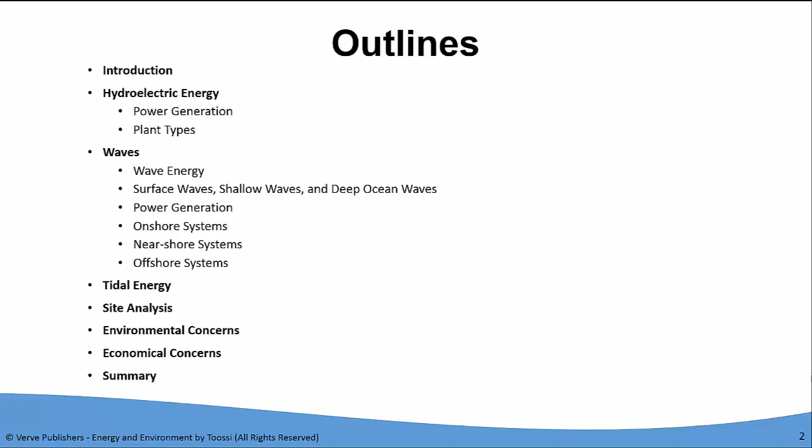In this section, we talk about the various aspects of the water. It's used to produce electricity through the traditional dams, but we also can produce electricity through the waves, through using the tidal energy, and also using the chemical gradients and thermal gradients in the ocean's water.

Basically, water energy is in the form of mechanical energy. It can be due to gravity, which is the power that comes from the dams and the tides, or due to the motion of the waves, which, depending on whether they're surface waves or underwater currents, have different amounts of mechanical energy.

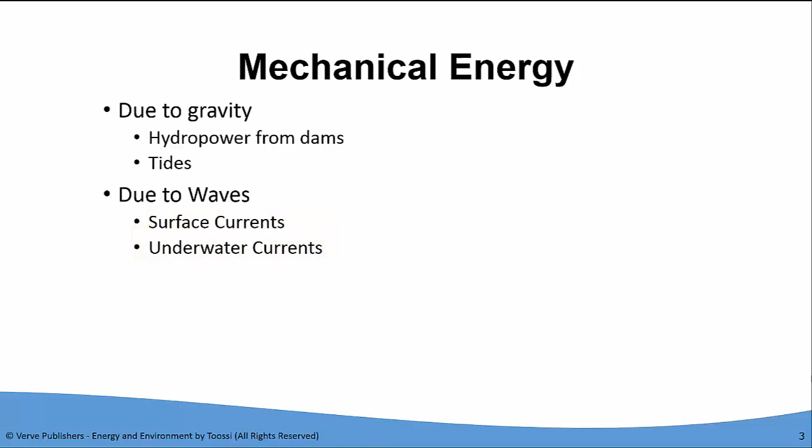This is the simple machine, water wheels, where the water falls on it and turns a wheel, and the wheel is used to lift the weight. That weight could be the weight of the water pulled out of the well, or it could be used to maybe turn another stone and grind the flour.

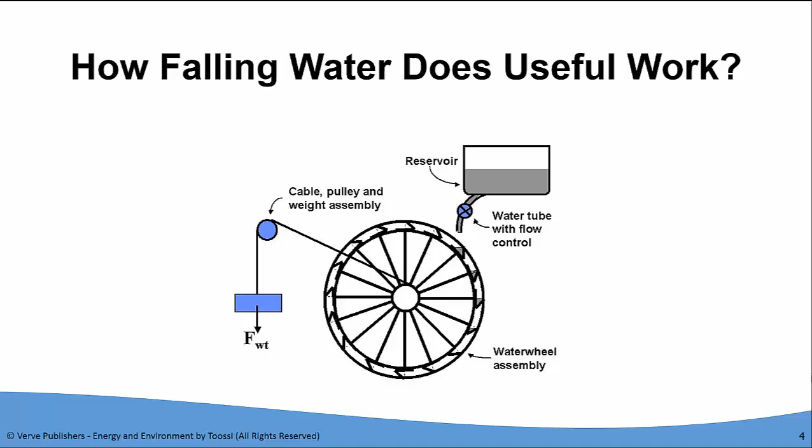Two medieval varieties of water wheels are the undershot and the overshot wheels. Undershot water wheels refer to a paddle wheel fixed to the bank of the river or hung from an overhead bridge. It is turned by the impulse of the water current. Overshots work by bringing a stream of water through a pipe or canal and putting it onto the wheel from above.

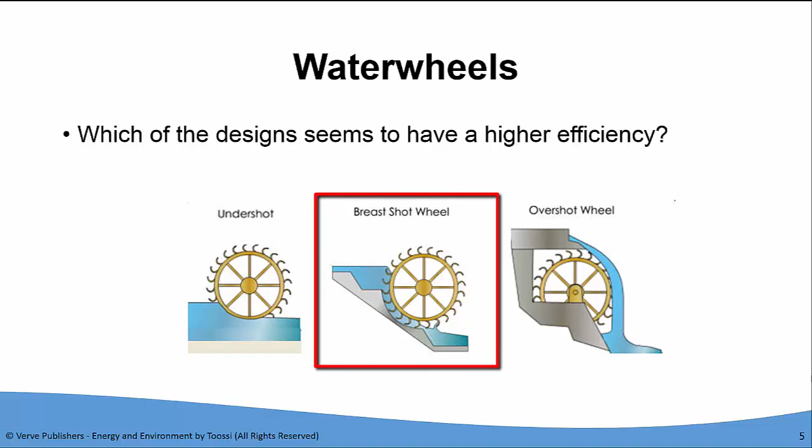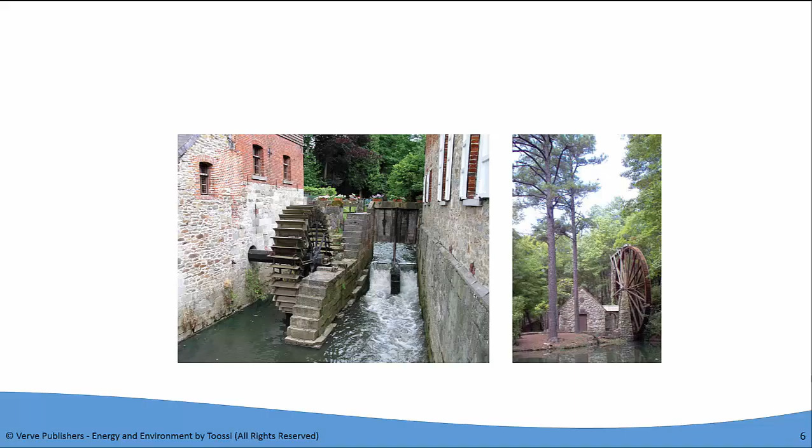Somewhere between the undershot and overshot, we can also have the breastshot, which is pretty much at the same level as the flow of the water. These are two examples. The diagram at the right is an overshot, with water poured from the top, and the diagram to the left is the undershot, and as you can see, the flow of the water will turn the water wheel.

Hydroelectric plants range in scale from large falling water plants used in developed nations to small river runoff plants with no dams or water storage, used for rural electrification in less developed countries. The potential for further expansion of hydroelectric plants for most of the industrial countries is rather limited. They have already built dams wherever they could. But in the developing countries, especially in Asia and Africa, very little has been exploited so far, and so there's a lot of potential for developing small hydro projects.

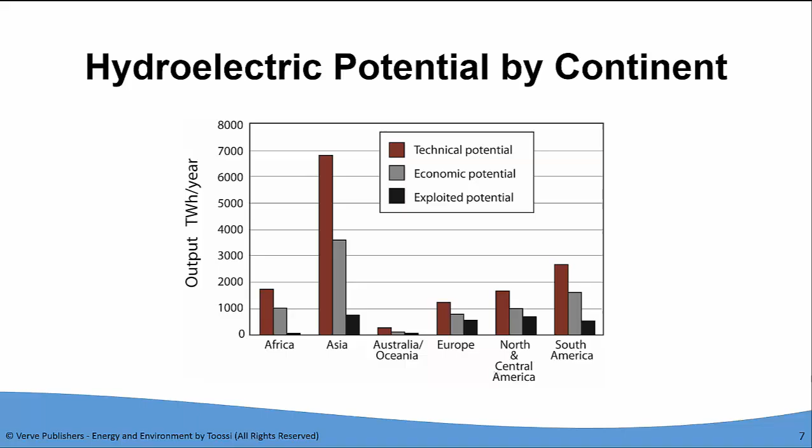This table gives the largest hydroelectric plants in the world. The largest one is the Three Gorges in China. As you can see, the head is a 185 meter drop, and it has a very large flow rate, about 12,000 cubic meters per second, producing about 22.4 gigawatts of electricity, and on average every year it can produce 100 terawatt hours of energy.

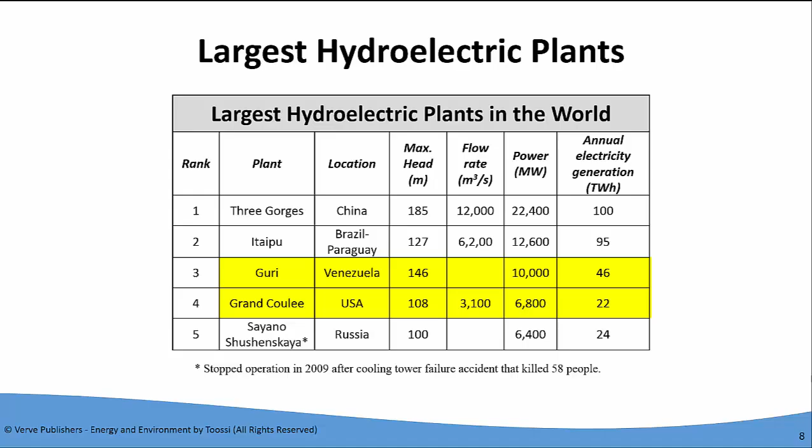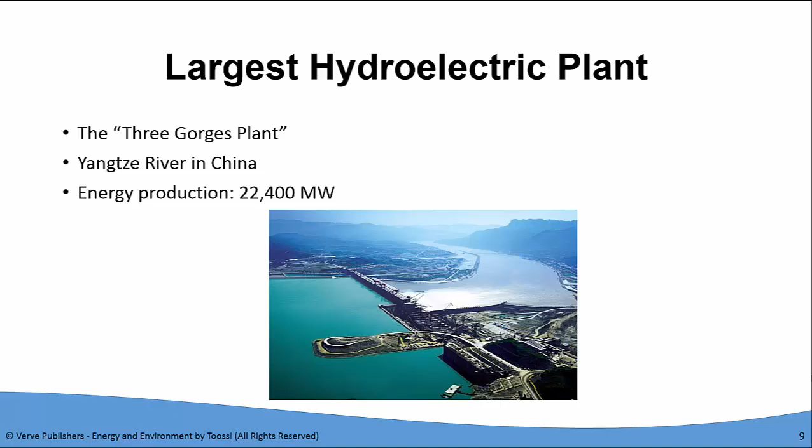The second is the Itaipu, which is on the border of Brazil and Paraguay, and very close to Argentina. This one has a lower head, and the total power is slightly less than the Three Gorges. Other power plants are in Venezuela. The USA's is the Grand Coulee in Washington, and that one is only about 1/5 as large as the Three Gorges. This is the picture of the Three Gorges plant, which is installed on the Yangtze River with a production capacity of 22,400 megawatts or 22.4 gigawatts.

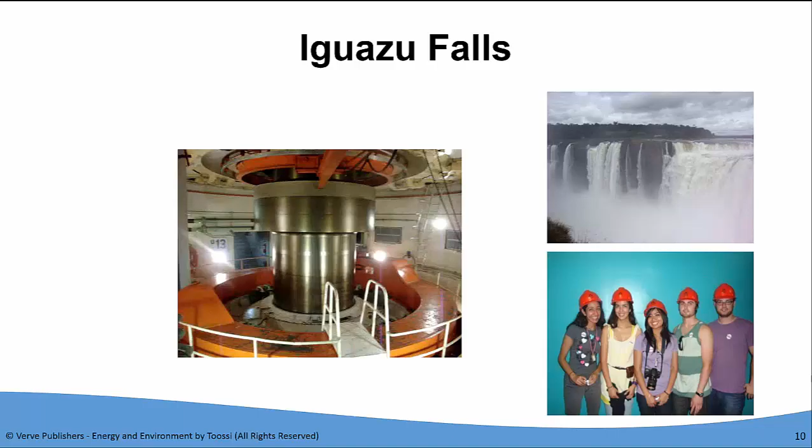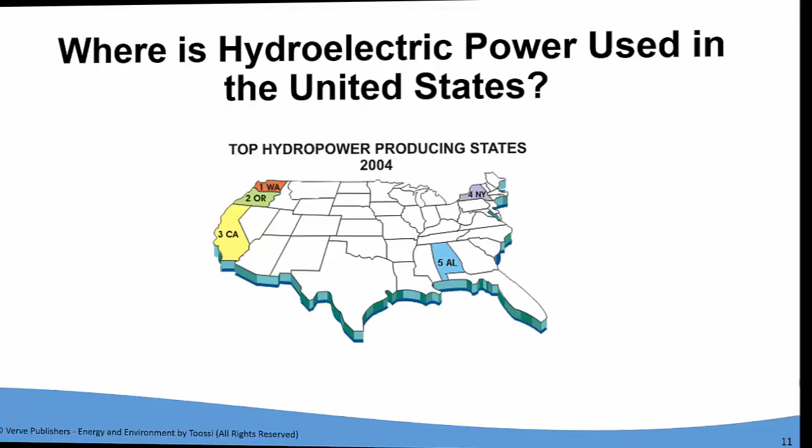generator which produces electricity. Hydroelectric plants are basically concentrated in only 5 states. Washington state, Oregon, and California are the 3 largest ones, but there are also some water projects in New York and Alabama. There are many different hydroelectric plant types. That depends on how much flow we have and what the height of the drop of the water is.

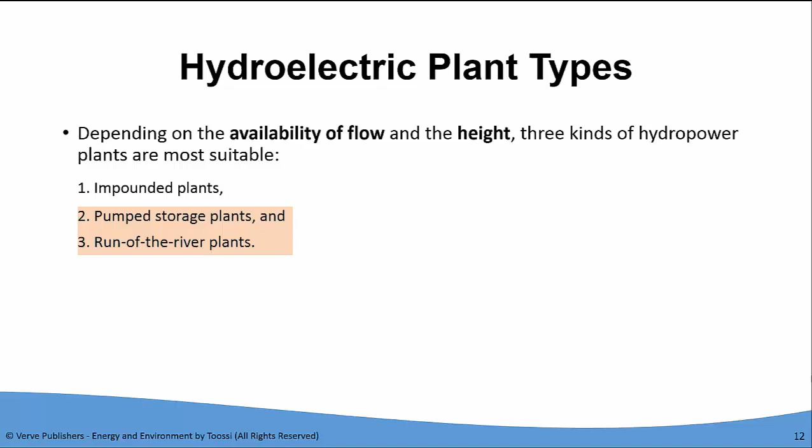They could be called impounded plants. That is like traditional dams. The water is impounded behind the dam and it falls to produce electricity. The other ones are the pumped storage plants, and then there are run of the river plants. Impound plants, as I mentioned, are a very traditional type. It's basically water which is stored behind the dam, and through a penstock the water flows, and the kinetic energy of the water is used to turn a turbine, and the turbine is connected to a generator which produces electricity.

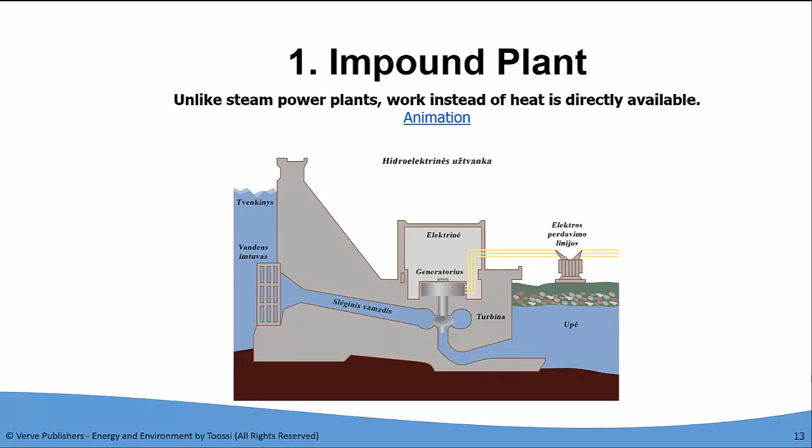With impounds, the main problem is that the level of the water which is available changes during summer and winter, and so that will cause some variation in the power during these seasons. Also, to build a dam, some natural flow of the river has to be interrupted, which can also interrupt the transportation of not only fish but also ships and boats. It does affect the water quality somewhat because of the residue and silt which is sitting stationary upstream, and the silt which is flowing downstream of the dam.

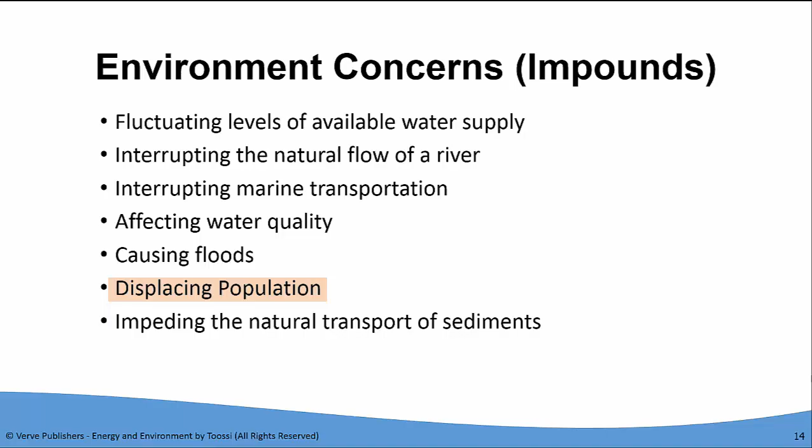It may cause floods downstream if the dam breaks, and upstream as there's overflow of the water. Because of that, population can be displaced, as was shown in the Three Gorges. 1.5 million people had to be displaced because of the construction.

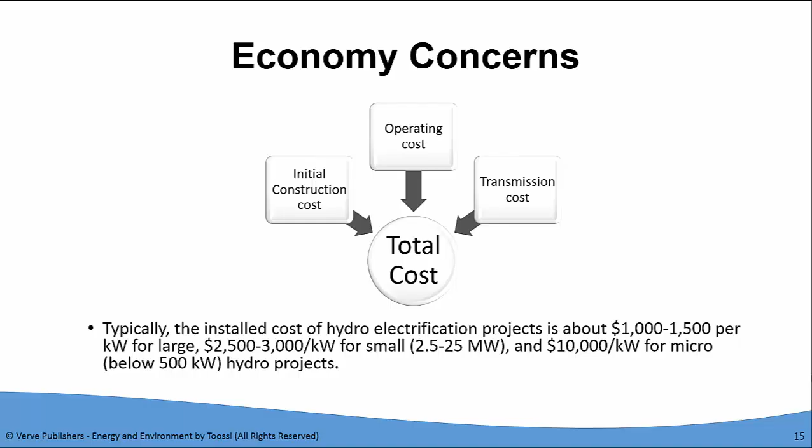The economics of the dam, of course, is very important, and that depends on the cost of construction of the dam. Initial construction is the major part of the cost, but the operating costs and transmission costs are relatively small. On average, every hydroelectric project costs about $1,000 to $1,500 per kilowatt of power generated, but the price goes higher as the size of the project becomes smaller.

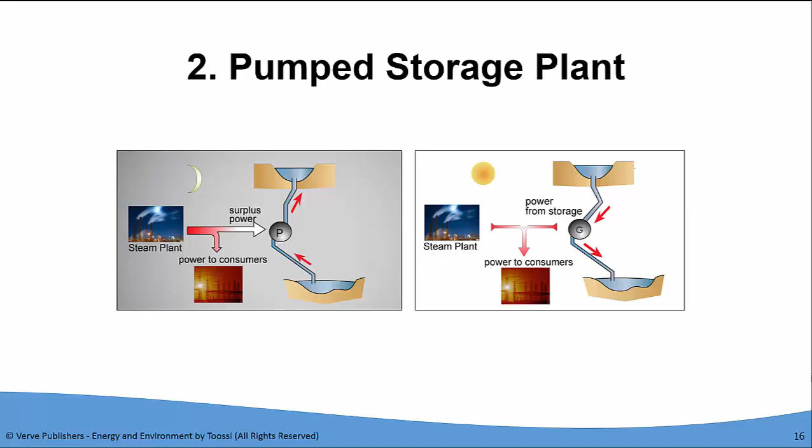In the morning, when the demand rises and the power to consumers is not sufficient, the plant cannot provide all the power, so we need additional power. Then we can turn the pump backward, run it as a generator, and the water will flow back from the elevated reservoir to the lower level reservoir, producing additional power.